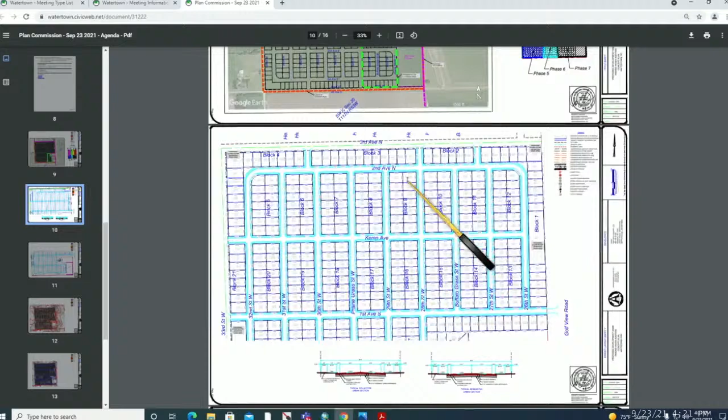Yes, thank you, Jeff. So as Jeff stated, we are looking at the concept plan for Prairie Haven addition today. If you guys recall, just recently we did annex and zone and also review a TIF plan for this area, which would be in the first phase. So it was 34.98 acres that we annexed and zoned. We brought it in this general vicinity. Let me go back to this agenda item to guide so you guys have a better idea. So maybe here. So you can see there with phase 1, so it will include these 2 streets and then the first row of lots there.

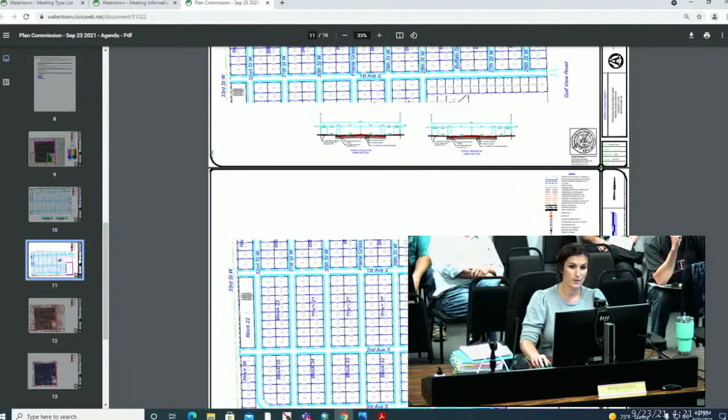So that's 35 acres, was annexed and zoned, brought in as agricultural district as just kind of a placeholder as we work through getting the concept plan approval before we would come back and do a rezone then, as long as the concept plan was approved on what they are proposing. And so getting into the zoning component, they are proposing basically, for the most part, R1c, which is a single-family compact residential district, which, if you guys recall, this would be the first subdivision that would be utilizing this zoning district that we created a couple years ago. So that's exciting that it is proven to be able to be used, and hopefully we'll have some benefits and offer a different type of subdivision for just various options for buyers.

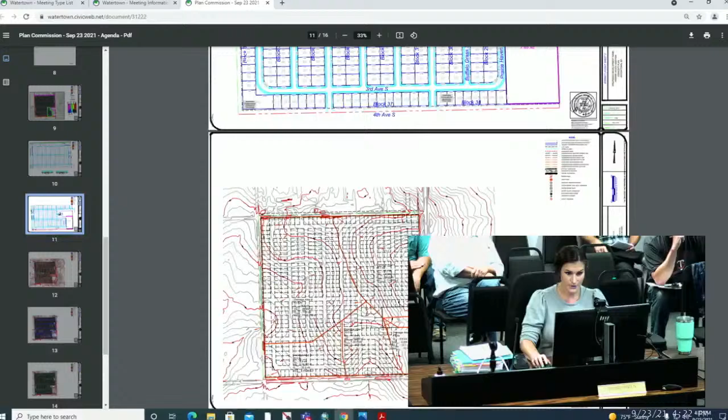They also have reserved an area down on the southeast corner of the development. You can see where they have it dashed with the green line there. They are reserving that it could be reworked to potentially be either C2 or R3. C2 is the local commercial district, or the R3 is the multifamily residential district. That just would potentially offer some opportunities for some neighborhood retail or commercial space. And then R3, which is the multifamily, if they wanted to transition and do just various uses there with having the smaller lots, if it's an opportunity for some storage areas or apartments or townhomes. So there's options there.

And then you can see, so the rest, everything else outside of this would be the R1c zoning, which once this is all done, there's 7 phases. It would be around 500 additional lots. And we did present this. The design review team approved this plan that's been submitted. And we also brought this to the park board, where they approved the location of this park area, which is the 7.65 acres. That's in the southeast corner. Oh, I think before I said southwest, so sorry. The park is also in the southeast area.

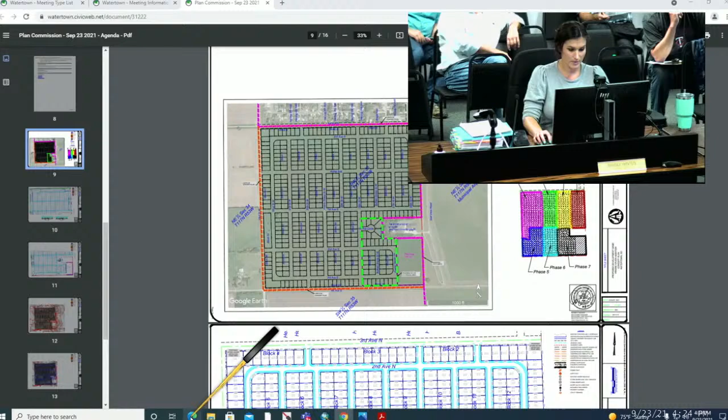So this is what the park board looks at as far as proximity to other parks. And so you'll see that we like to keep neighborhood or community parks within a half-mile radius from each other. So we looked at that with the park board, and you can see that actually the entire area that phase one is in is within good proximity to a park, which is that of Derby Downs.

I think I touched on everything. So with that, I will open it up for any questions from the board. Okay, thank you, Brandy. That was a very detailed summary. When I first looked at this and I saw the smaller lots, I thought, are they doing a PUD? And then I saw that they were doing the R1c, and I was kind of excited to see that finally happen. I know we worked really hard to create those lots, with the idea of having some smaller ones. So seeing it on paper is a cool thing.

I will open up the public hearing if there is anyone in the audience or online that wishes to step up to the mic and speak either in favor or against this item. Please feel free to do so.

Also, Brandy, looking at the plat, I see there's a few blocks that are adjacent to 4th Avenue. I know normally we try to not have double frontage streets, but I'm assuming that the city is going to allow that because we probably don't want to allow access onto 4th Avenue. Is that correct? That is correct. So 4th Avenue, and you can kind of see that with all of the streets around this quarter section, they all function as collector routes. So we do like to minimize access points, especially for individual driveways. So you will see that there will be the double frontage.

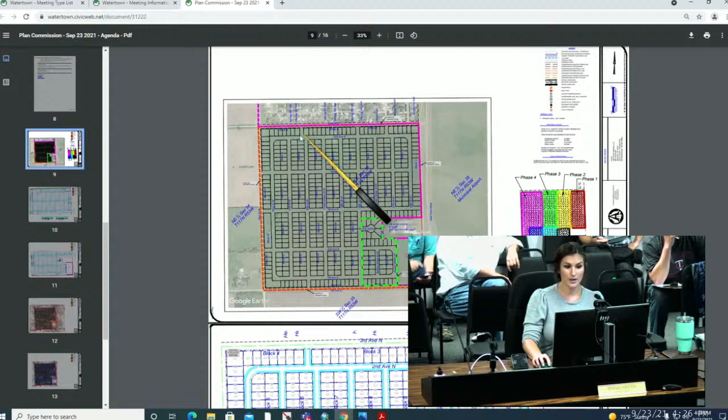Another constraint is because they are rural street sections at this point. So to have them accessing onto that street with the ditch section, it's just not as conducive. So I think when it comes to the plat, we would ask that there would be a no access restriction, so we wouldn't run into situations like we see on 3rd Avenue with Derby Downs. These lots are not supposed to have access. Even with these lots here, they should have accessed the side street. So it's just all around for traffic flow, trying to reduce access points onto collector routes.

And the city engineer and public works director, Heath Von Eye, is online if he wants to chime in at all to that point, if he has anything to add. I appreciate that. Thanks, Brandy. Can you hear me okay? Yep, go ahead, Heath. I don't know if my video is going to work very well here. Maybe I'll just go with the sound.

But to Brandy's point, we do look at the regulations in regards to those double frontages. And the way the guidelines read right now is that we try to steer away from them, particularly those double frontages when you're adjacent to an arterial street. But also when you're looking at a collector street like this, as long as we're prohibiting the access, that's the city's main goal on preventing numerous individual residential accesses onto those collectors or arterials. Now, could this be redesigned in a way that looks a lot different? Absolutely. There's a thousand ways you could design 35 acres of land and come up with 1,000 different ideas.

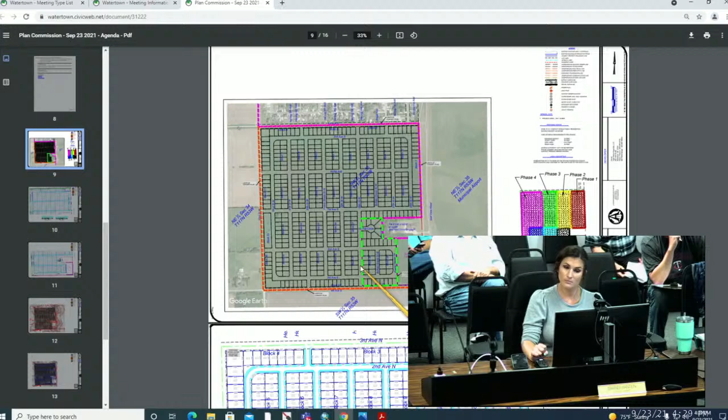Yeah, thank you. So around the perimeter of this development are major collectors, and then is there a minor collector through the middle? Is that First Avenue and 28th Street? Would those be our designated minor collector routes? You would have First Avenue, yeah, and then this would be the 28th. Is that 28th? Yeah, that's labeled 28th on mine. I'm just noting, as development continues on to the west or the south, that we would probably try to keep that connectivity as well.

And they did line that up strategically when we reviewed it with the design review team, that we wanted to have at least one through street. And Derby Downs is very choppy, so for these streets they didn't line up all the way, but at least it's a small portion that's not extending miles to the north. It's not the collector route.

And Derby Downs is cut off on the north anyway, just because the city property is there and there's the topography issues. So we were comfortable with the alignment of retaining those minor collectors throughout. Yeah, thank you. And the public hearing is open if there's anyone that wants to step up.

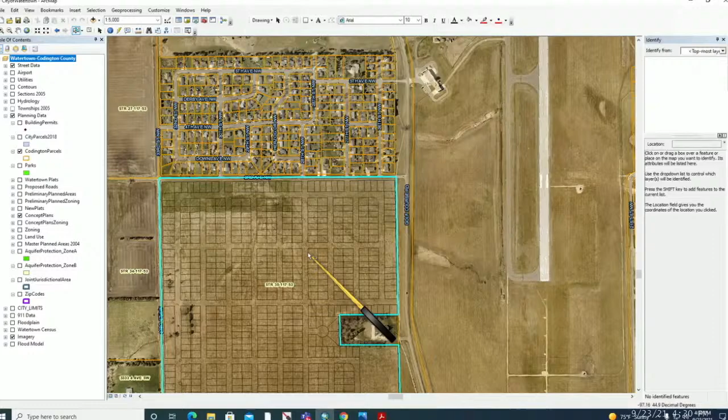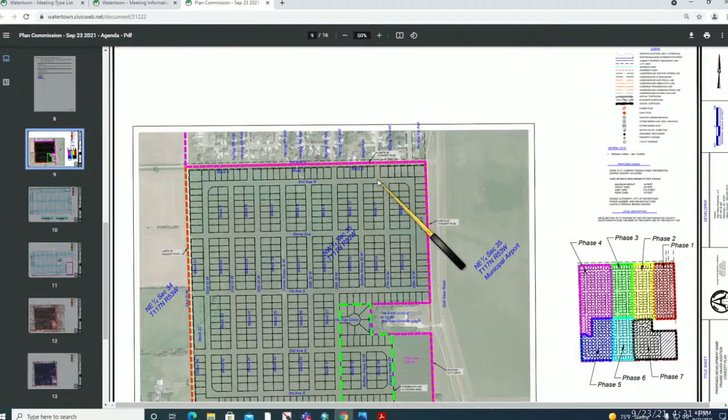Mr. Chairman, Heath here again. Sorry. Go ahead. Brandy, with the alignment of those streets as they're tying into the existing, I don't know if it's something we maybe missed on the resubmittal, but we do want to double check before we finalize any subsequent plans that they meet the offset spacing requirements. So take 27th Street, for example. Yeah, right there, that offset.

The theory is you don't want a street to have such a minimal offset that it promotes an awkward, quick little swerve through an intersection, but an adequate offset, so it's a hard turn and then another hard turn to actually make that traffic movement safely. So if you follow 27th up, that'd be the one that'd be more concerning.

Yeah. To the east, though. Oh, okay. The offset to the east. No, you're on the right connection, but go to the east now, to 27th. That offset there is pretty minimal. Yeah. That move. Honestly, that's probably something where we could even just look at removing them, because then it would filter everybody to the collector, and then they could access onto Third.

But we can confirm that if the Plan Commission is comfortable with staff looking at that in regards to the engineering design standards, and then working with the applicant on getting that amended to make sure it's in conformance. Does that sound all right with you, Heath? Yeah, it does. Okay, and for the board too, if we just make that in the motion, if you're comfortable. Yeah, I think that's a good idea.

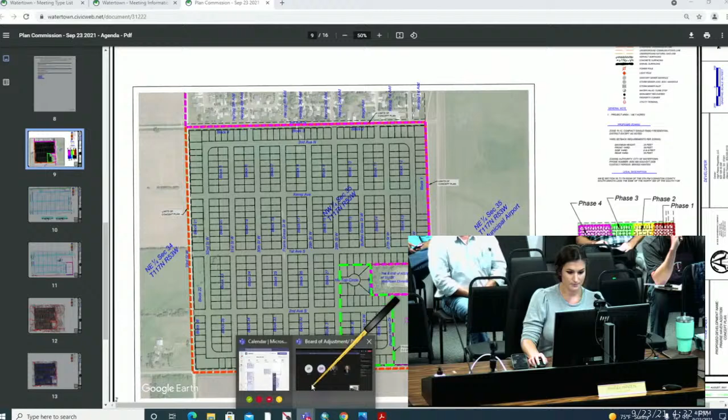I did see someone in the crowd that had their hand up. If you wanted to approach the mic and state your name, you certainly can. And Diana had a question online too, I believe. Sure, I can wait. Yes. How does that work? And then we'll turn that on.

My name is Gary Kicker, and I'm gonna get up and show you, or can I run this? I'm here on behalf of my mother-in-law, mostly, who lives right here, Bev Morrison. And my place is right here. I'm directly west of there. And when we built here, Darwin Brinkman actually, and I talked to Steve briefly about this prior to the meeting, I wish I would have brought the paperwork, but there's 100 and some odd acres through here that drain between Scooters and my place and run through this box culvert right here.

And then there's 130 some acres in this area that run through. And I'm telling you, we can see the creek. It runs through the sheep pasture, through the trees, and all these trees are dead because of the last flood. And it runs right between here, this is my food plot, and it goes down here, and it runs through that box culvert. I'm just concerned that there's enough retention. And I understand this one, and that's great placement. That's the right place. This one I'm not sure about.

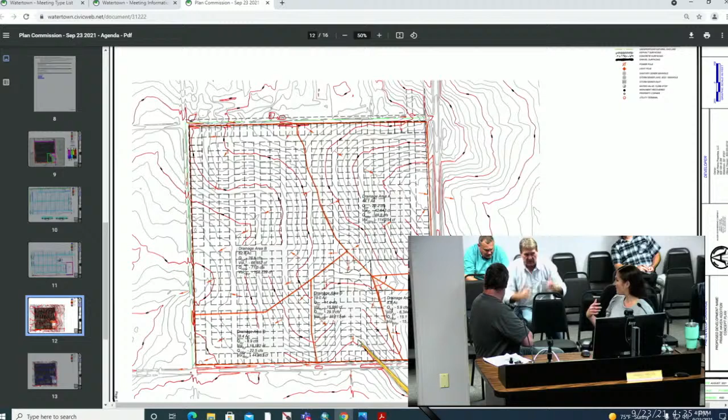So Heath, unless you want to answer, I can provide some clarity of what this map they present with the concept plan is, and then the city's requirements when we get into the preliminary plan phase. Brandy, we also have Rod here that drew it. I live right next door to that. He can understand on the water. I'm a neighbor too, and I'm the designer. Hold on, so Heath, actually, Rod is here with Austin Engineering. Okay.

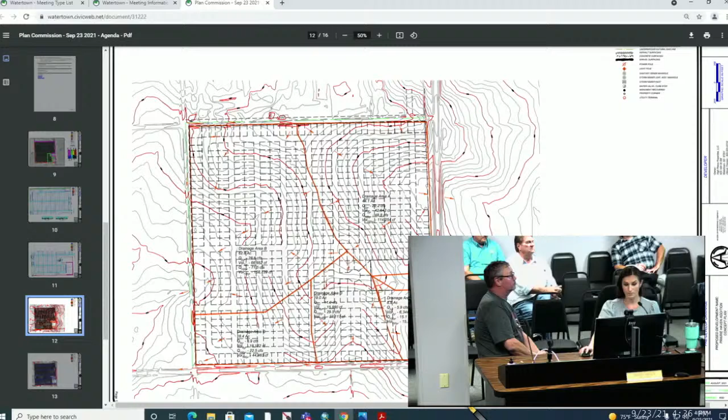If I could touch on it briefly from a regulatory standpoint, just so everybody understands what we look at when we approve these plans. With a concept plan like this, we get a drainage report, and in that drainage report, the licensed engineer, which is Rod, who's in the room there, is required to do a hydraulic analysis. And what they look at is the current runoff and the amount of flow that's currently going through this undeveloped amount of land. And then they calculate the proposed runoff based on the imperviousness, all the asphalt and rooftops and curb and gutter that get installed, and how much that increases that runoff.

And then what the developer is required to do is detain all that additional runoff so that they're releasing only at the historic runoff rates. And they break the area down by basins, like this map here that Brandy's pulled up. And they know what direction that water is flowing in, and then they strategically place those detention ponds so that they're in a catchment basin. They're in the low spots at the edges of the development so that it catches that runoff, detains it and holds it back. And the way they do that is they throttle it back by sizing the outlet structure a lot smaller so that it's releasing at that historic flow rate.

But anyway, that's just a general summary that we do check that off, and that's part of the requirements for the development. But I'll let Rod speak to their design here if you'd like. I really don't have anything to add. Could I have you speak to the mic, because no one online can hear you? I'm sorry. I know better.

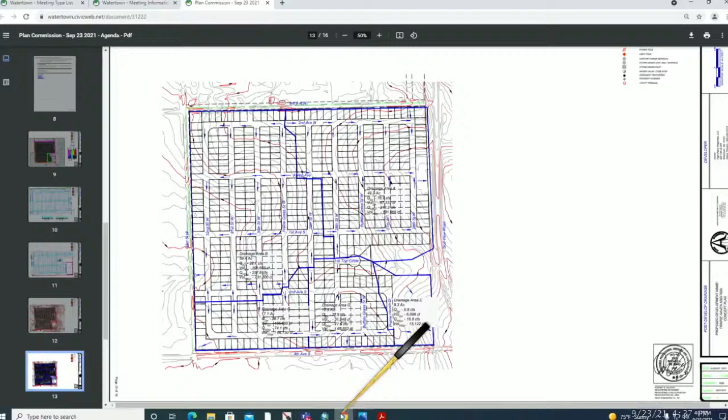Yeah, I'm Rod Young. I'm the engineer on the project with Austin Engineering. I do have a vested interest in this. I actually live two houses down from him to the west, right there. And I've seen the water come through there, and I know what the water does. I've also seen the water coming through the township road there right now. So I know what's going on there, as well as what comes down through Derby Downs, through that little bit of retention pond up there.

And it goes down through that east ditch of the township road. And it got pretty soggy here a couple years ago when we had all them rains. So I do have a vested interest as well, not only as an engineer, but as a landowner downstream. Awesome. Thank you, Rod. Let's see if they have any more questions for Rod. Rod, are you comfortable with it? What's that? Are you comfortable with the drainage? Pardon? Are you comfortable with what you see?

Well, when we get into the design of the thing, that's when we really get... Here, you can come up here. Well, let me just chime in. When it comes to drainage on developments, this is a conversation we have with every development, whether it was recently, when we approved developments north of 14th Avenue, or this development, or Eastwoods, or any development, we do have to look at the water and where it's going. And I used to work for the city. I know the stormwater ordinance manual that they have is extensive because of that. So this isn't something we take lightly.

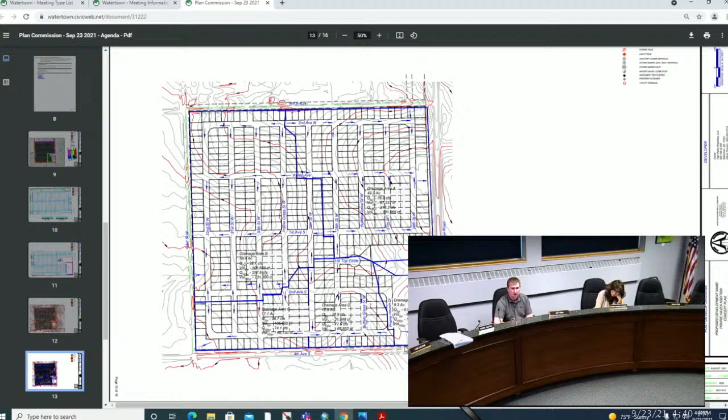I didn't mean to interrupt. If you would like to address it any differently, please do so. So the question was asked if Rod was comfortable, and Rod is the engineer that designed this, so hopefully he put a stamp on it. I'll be comfortable with it when we get done.

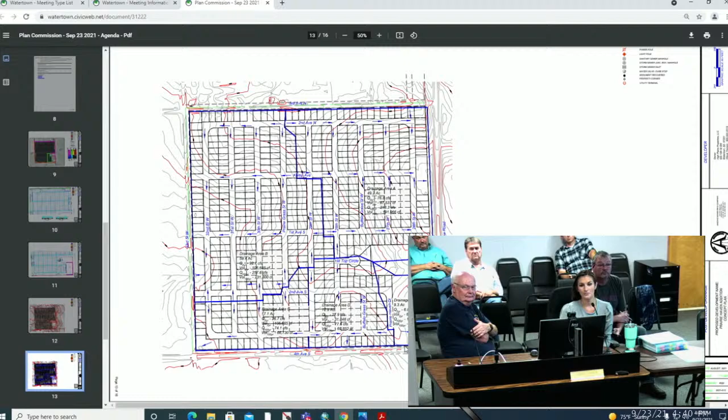Brandy, I have a question for you. Are these roads ever gonna go from rural width roads to street width? Yeah, so we would look at that at the time; they would have to be a larger project, and that's something that we deal with all the time.

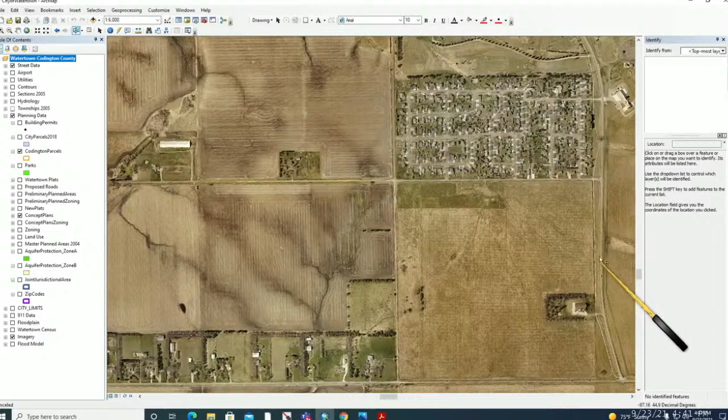So that won't be an issue with this phase, but when we get further to the west and start annexing and zoning and platting those phases, we will definitely work with township and county at that time. Well, okay, so Golf Course Road, I assume we own quite a bit of that road right-of-way? Yep, so all of it that is adjacent to phase 1 is now annexed and zoned. Okay, so a large right-of-way.

And then what about 4th Avenue on the south side? If that goes wider, would we not need to take some of their land in order to do that? At the time of annexation and zoning, we would annex and zone to the center line of the section line right-of-way. And so you can see here where city limits is today. It ends at that radius there of Golf Course Road and 4th Avenue. So that would be something for the future when we're looking at annexing and zoning, that we would bring in half of the street at that time.

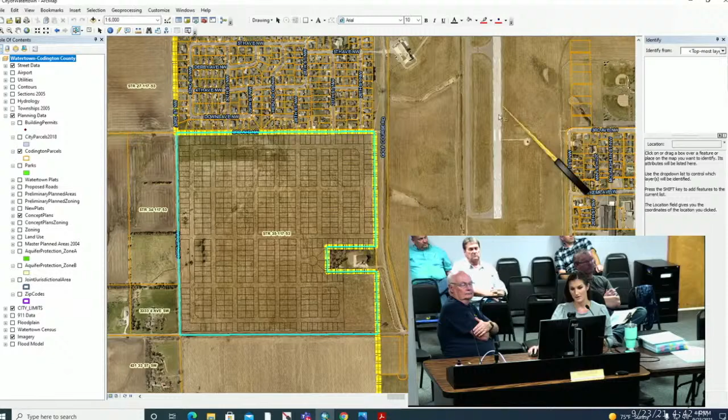So that could potentially change the plan though at the south end of this, right? Or not? Along 4th Avenue there. Potentially. And if it was something major, if there was a major revision, we would bring the concept plan back at that time. But as far as phasing, like I said, there's 7 phases, and I don't know if they had a timeline included on here, but it'll be in the future, and we'll just keep a pulse on it to make sure that nothing is changing that would need to come back as a major revision to the Plan Commission.

So it will be during phases 4, 6, and 7 before we have any additional exits onto 4th Avenue. And then we have other ones that go north into Derby Downs, a couple, 3. So I'm just saying, we're gonna get a lot of homes in there, and everybody's gonna head to First Avenue South to get out of there. Yeah, okay, I see your point there.

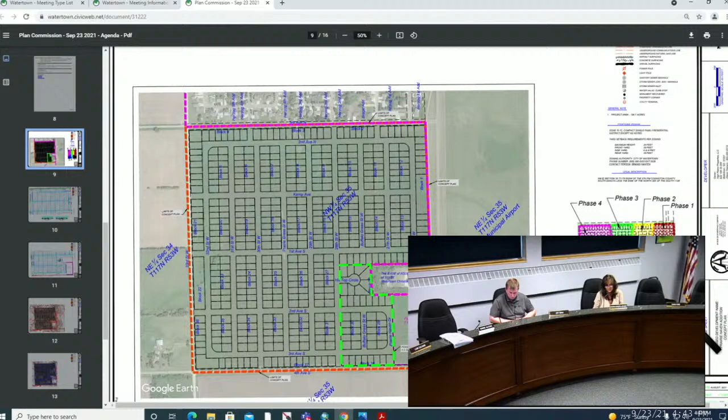So my point, what I'm asking is, at some point, are we gonna widen Golf View so that there's a turning lane there? Because you're gonna have a lot of traffic with doubling the size of Derby Downs out there. At what point, is it just a traffic count that we take and we say, okay, this is the year, we gotta widen this road now with a turning lane? Yeah, and we have the master transportation plan that shows the traffic counts, and whenever it is warranted, in whichever phase we're in, we'll address it at that time.

And sometimes there's just all different regulations as far as fire access, secondary access, when you get so many dwelling units. So all of that are things that we'll take into account as we progress in this concept plan. But what we're looking at is the overall layout, and then as we come into phasing and the different platting and annexations and zonings that'll have to take place, those will all be addressed and reviewed again at that point.

Because remember, the concept plan is the overall master plan, and then each phase has a separate preliminary plan that has to be submitted, and that is reviewed by staff, and if it's not conforming to the overall layout, then we would bring the concept plan back to the plan commission to look at that overall structure.

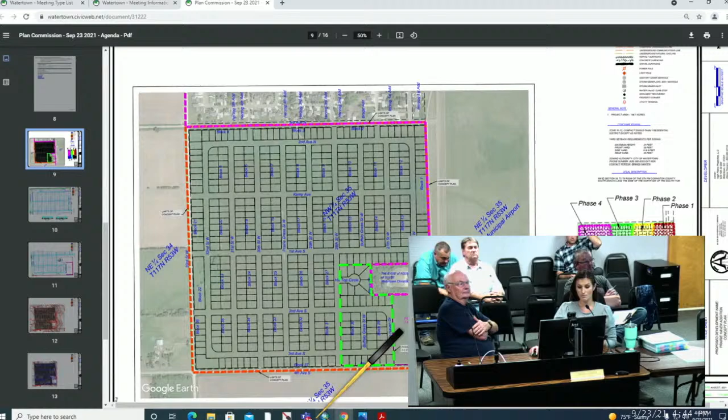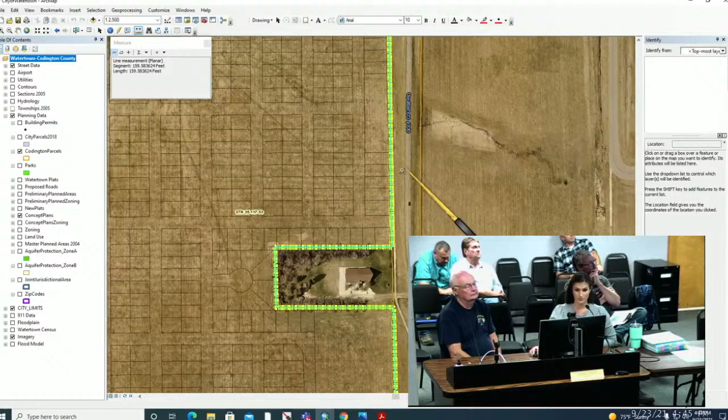But the one thing we would want to do is make sure that we're accounting for adequate right-of-way width at a minimum. Yeah. And then the rest of the details would come into place with the preliminary plans later on. Yeah, and we checked on that, Heath, and like for Golf Course Road, we actually have 160 linear feet for the right-of-way there, so that one is larger than an arterial.

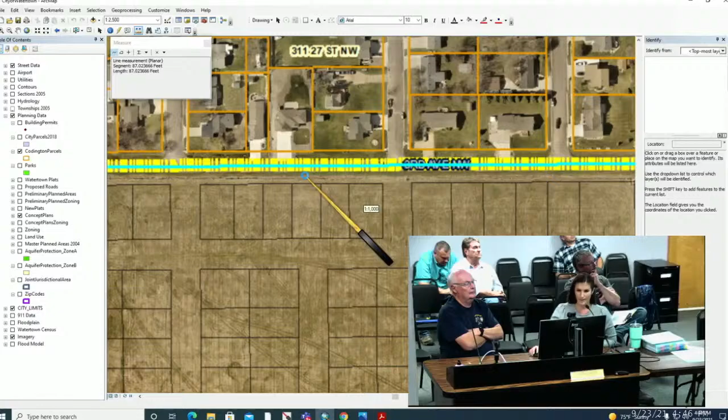And then as far as Third, we have the 66, and then as far as down here, for our collectors, it's typically 80. So this location, I guess we can look at that further, but I don't think with our major street plan, I think this is a minor collector, so 66 would be adequate. Yeah, that's what we need to check off, whether that's 66 or 80.

Can I add something here? This is Rod. I did take into account an additional 7 more feet on this development all the way around to make sure we had 40 foot. Great. Sounds like we should be covered then. To the commissioner's point, that's a good point there. I wasn't sure if we had that checked off or not, if we preserved adequate right-of-way all the way around. So that also on the north edge of Third Avenue? You did the same there? I did there, on the north, on the west, and on the south.

Yep. So it is bounded by 2 major collectors, that's Golf Course Road, and then Third Avenue, or no, 4th Avenue, sorry. And then on the west and north, those are minor collectors. So we will verify, at the time of platting too, that we are reserving adequate right-of-way, and that is good to double check. So thank you for bringing that up, Rhonda.

Thank you. Are there any other questions that the board members have for the developer as he's still sitting here? Hearing none, is there anyone else from the public that wishes to speak on behalf or against this item? Hearing none, I will close the public hearing and look for a motion and a second from the board. And I think that motion should include reviewing the street offsets as Heath previously mentioned for 27th and 30th Street, but I'm looking for a motion and a second. Were there any other caveats or conditions? Nope. 27th and 30th? Yes.

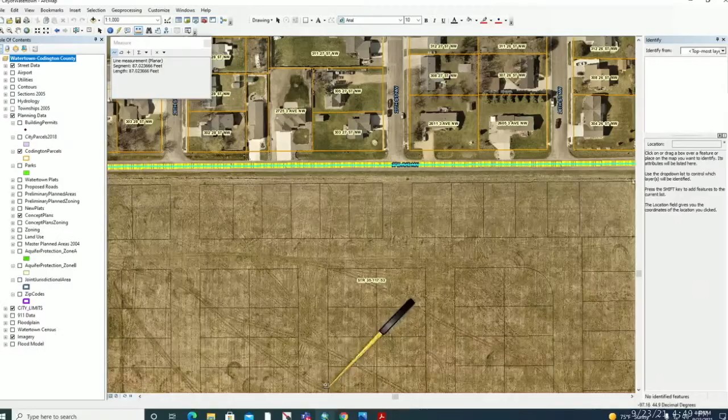I would expect that they would utilize the recreational trail, and then that would be tied into this park area. And then along 4th Avenue, that's also the bike trail, I believe, shown in the master trail plan to extend that way too. So I wouldn't expect them to be having to go through that, because there would be no connection potentially. Or if they stay with the R1c zoning, they would have that connectivity right there. So this is how they have it laid out if they would keep it at the R1c zoning. And so you would see here that they would have access on Prairie Haven Drive.

I guess I'm just worried that should it become, as was mentioned, storage facilities or private property, the expectation that kids would use the bike trail when there's a more direct route might be unreasonable. So the idea actually, I suggested that they do some mixed zoning, because with the smaller lot sizes they would have some opportunity for storage if that was a necessity, which I believe it is within the community. And then also little niche zoning of potentially retail opportunities or food establishments, things of that nature. But they have it planned for R1c, and if it were to change at the time of this phase, it would have to come back.

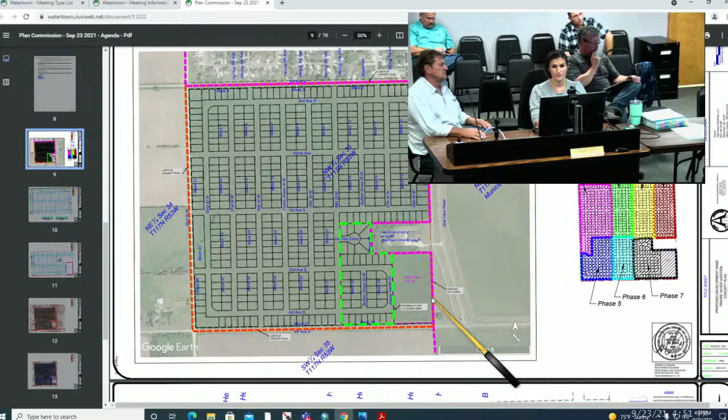Yeah, all right. I think to that point, to reiterate what Brandy said, right now the proposal in front of us is an R1c zoning. It was just maybe a thought or a feather in the cap that maybe we could do something else. But right now, I feel like what's in front of us is approving a concept plan with residential R1c zoning.

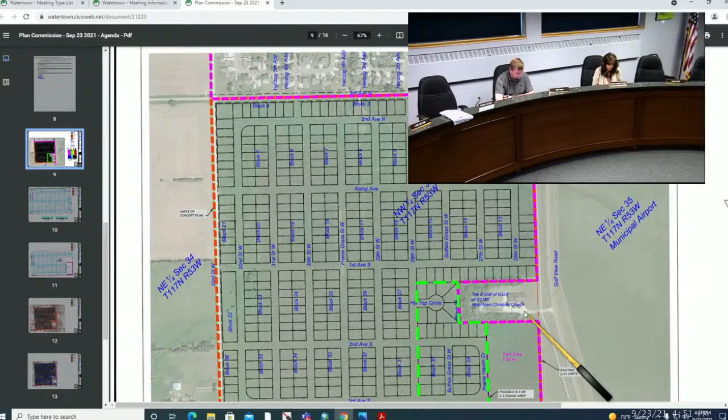Well, I get that point, Mr. Chair, but when it's marked off like that in the green, it looks to me like it's more within the concept plan, even though it says it's the smaller lots. It is definitely marked off as something else, and it was definitely mentioned that it could be commercial or storage facilities, which I guess, I know we're just talking about the smaller lots now, but it looks to me like it's more than just a casual comment, and I wanted to bring up the idea that we need to be cognizant of safety for those kids. So I'm glad to hear that should that be changed somewhere in the future, it would come back before the board. That was what I needed to hear.

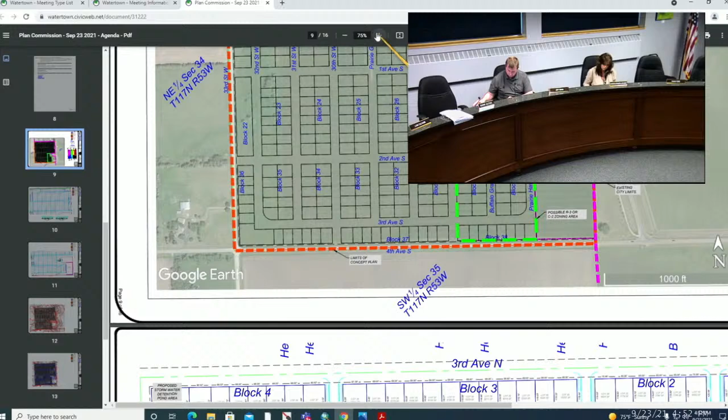Yes, and I apologize, Diana. I did kind of hit on that as if it were being zoned that. I should have been more specific that everything is proposed to be R1c at this point. Thank you. Brandy, just a point of clarity though, they'll only be zoning this on a per phase basis, correct? Right. So if and when we get to that phase in the future, what I was going to recommend is keeping that concern in mind when we get to this phase of that development. We'll want to make sure if it is coming in as C2, for example, that they're preserving some kind of connectivity there for that park access. Yes. But that would be done when that phase is zoned, is the point I wanted to make. Yes, good point, Heath. Thank you. Yes, and really good point, Diana.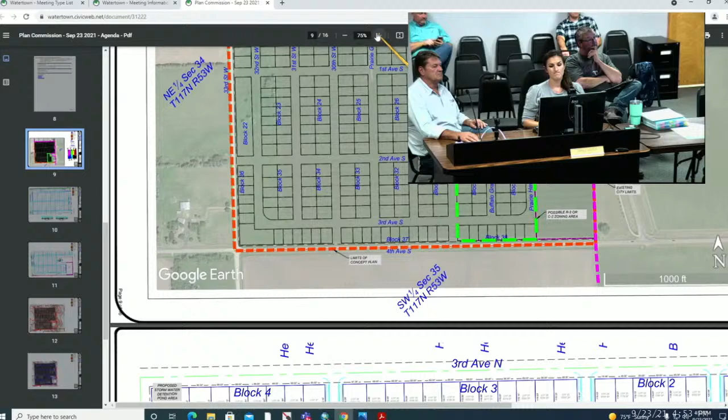Are there any other comments or questions from any board members? I'll make one just to follow up with that. I think when phase 6 comes in, with the potential of phase 7 being commercial, it's only fair at phase 6 that this is addressed, because those people are buying residential lots that may squeal, just like we had on 81 when we changed that to commercial, when they're thinking it's all residential and all of a sudden we have commercial. So just something else for the minutes. Yes, good point. It's always good to have the history.

Yeah, and then if when we get to phase 7 they are thinking commercial, maybe they could flip-flop where the park is, and then there'd be residential, park, and then commercial. Just a thought. That's a ways out, but we have some time before we get to phase 7. So. I see the applicants at the bench. I did close the public hearing, but if there's something you would like to add, okay.

No, that's fine. I'm Steve Thorson, and I was just going to comment, when we went through the Park and Rec, we actually picked up about an extra acre. So we're looking at those in the green section there to the right on the east side near the park. Our actual plans are currently R1c, and when we had to buy the land back, we could add another 4 lots right next to those. So we would anticipate that that's going to be more R1c than commercial. And frankly, I apologize, Brandy, but we don't really think that storage is the proper use for that area right there. It's going to be a wonderful looking development, and I don't really think we want to see storage sheds there. I'm just saying.